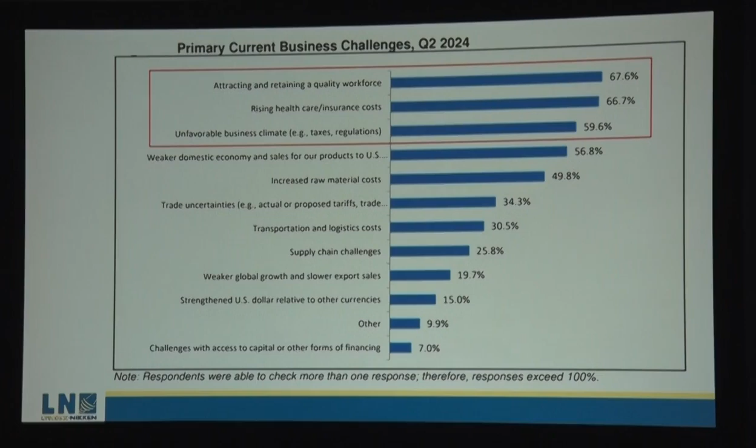Now, this slide is showing that retaining quality talent or quality employees is still at the top of our list. This was the second quarter of 2024. But what the article mentioned was that the rising healthcare costs and unfavorable business climate has actually grown over the last few years significantly. It was like a 20% increase on the rising healthcare. So it jumped up from that mid 40% up to the 60%. So attracting and retaining employees is still top of the list, but the increased cost of healthcare is taking over as well.

That's a national average, so I'm sure that if I surveyed California versus Florida, those numbers would look different. Something Steve and I were talking about today, I'm from Houston, Texas, and I still go into shops. I'd say 60% of our shops are still unair conditioned. You don't have to be in Houston to know that in the summertime machine shops get hot. But in Houston, you can pay your people less if they've committed to the industry and your shop is air conditioned. I used to live in San Antonio, and I was driving into Uvalde, which is like an hour and a half away, and they would bus their employees in from San Antonio, and they would work there because their shop was air conditioned. So I put that in there. My research did not show, hey guess what, Amazon is air conditioned, or Lowe's or Home Depot is air conditioned, but I do know that it is something that our employees are experiencing.

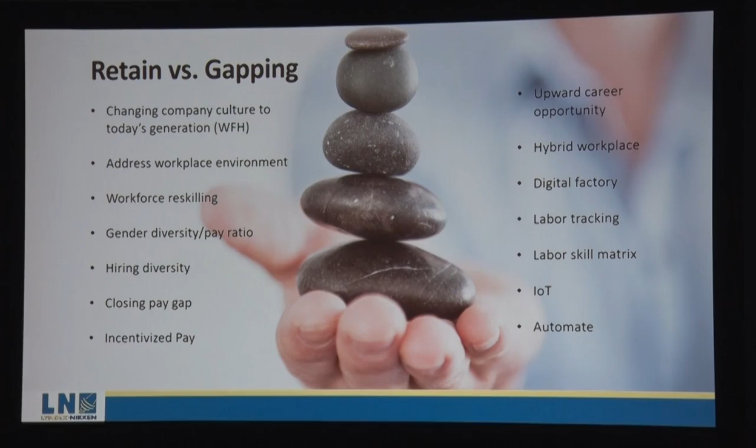And so today, as leaders, we can't afford to procrastinate understanding the changes that we need to make. I mean, it's the current environment, the future is telling us that we need to make these changes. And what we've got to understand is, what do we need to do to retain while bridging this gap? It's not an either or, like how do I retain or how do I cover the gap? We need to figure out how it works together. Some of these bullet points, I could read them to you, but they're all part of this corporate structure and the things that we're doing, closing the pay gap, workforce reskilling, the digital factory is how we're going to bridge these gaps. So these are all things that we need to understand as leaders.

And when we talk about lean manufacturing, I'm sure we've all heard this and have some kind of understanding of it, but lean manufacturing focuses on increasing efficiencies and decreasing waste. Of course, Toyota made this popular back in the 40s and 50s. They started doing their own experimenting. In the 60s, they started making big changes across their manufacturing facilities. There are 8 categories of industrial waste identified in lean: defective parts, overproduction, wait time, non-utilization of talent, inventory excess, transportation, motion waste, and excessive processing. And this looks different if you're an assembly plant, or if you're a production shop, or if you're a job shop.

The 8 categories of waste still exist within your facility, but how we tackle or solve this waste changes from facility to facility. So really the question is, does lean manufacturing work in a job shop environment? And does it mean we have to scale down our workforce? If I implement lean, do I need fewer employees? This is kind of a yes, no, maybe.

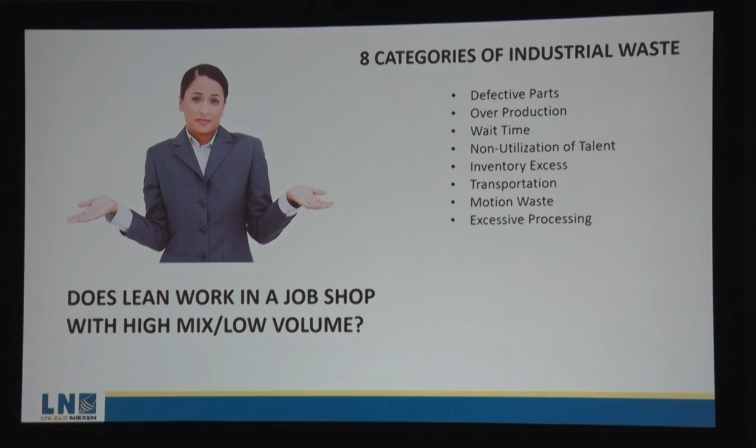We have conversations with manufacturers. I'll have a CEO with his programmer next to him. We'll be talking about automation, and the programmer's like, 'Oh, you're trying to get rid of me.' There's a lot of emotional connection to jobs, to job descriptions, to processes. So we have to take it as a slow step. It's more of a journey as we go into lean at whatever level we enter. But the changes are possible, and we have to keep an open mind.

So these are 4 of the steps we're going to discuss as we look at how we can convert our shops, how we can become more efficient. We have less people in our industry, so we really need to be able to make them more efficient. How can we do that as shop owners?

The first thing we need to do is understand where we're at before we can implement the other processes. We have to gather information and put together a plan in order to make our people more effective. We don't want to replace them—we actually want more people gathered in, and we want to educate them up. So we need to find where we're at and what the starting point is before we can move on.

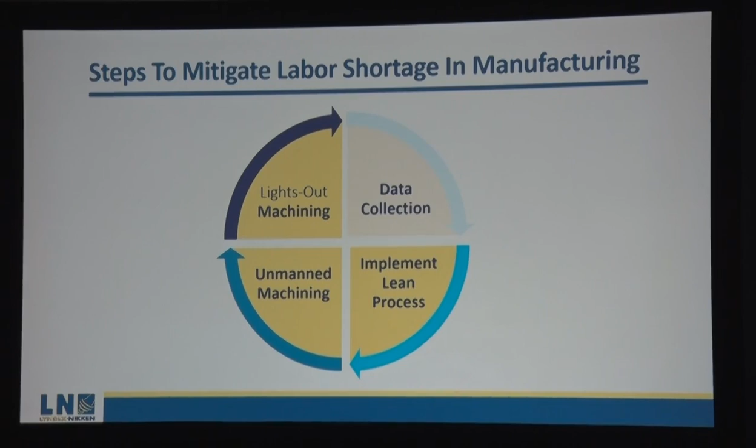Spacebar. Oh, thanks. Okay, so, data collection.

Right now, if you watch any kind of major sports, analytics is a key part of everything you find. Should I go for it on 4th and 1? Should I take a 3-point shot versus a 2-point shot? Data is very important for decision making. So if you're in a shop and you're not fully aware of what your machine times are and what you're doing, it's very difficult to make key changes.

So we need to start gathering data, and what's that going to look like? We don't want it to be so cumbersome that it's overwhelming and then we push it to the side. In the process of doing this, we have several areas we need to understand in our shops: measuring productivity of employees, and then machine efficiencies.

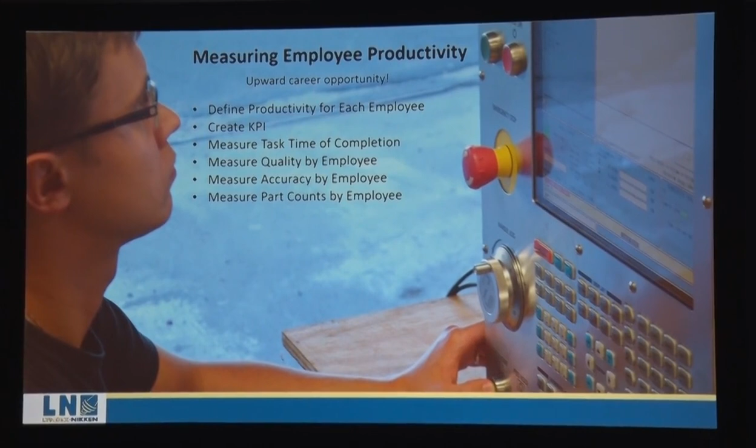So in order to keep personnel, we need to define what they do. We need to give them objectives. You want them to desire to stay in your facility. Is your shop clean? Is it safe? Does it have the latest technologies? Are you helping your employee do their job, or are you making it a hindrance? Are you using old technology that makes them struggle? If you're making your employees struggle, they're not going to be efficient—they're going to spend time frustrated doing tasks that could easily be done with updated technology or education.

So for employees to be happy and want to stay, you need to give them objectives. You have to have a way to measure what they're doing and set goals for them—key performance indicators. That could be as simple as: are you making your part count? Are you here in a timely manner? Is your machine running the times it should be? Or are you here on a Thursday, a little bit hungover, turning the feed rate down to 70%, cheating the system because you don't feel good that day?

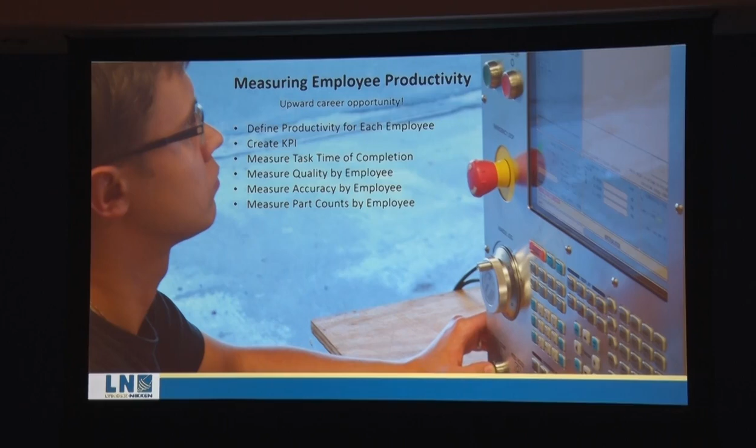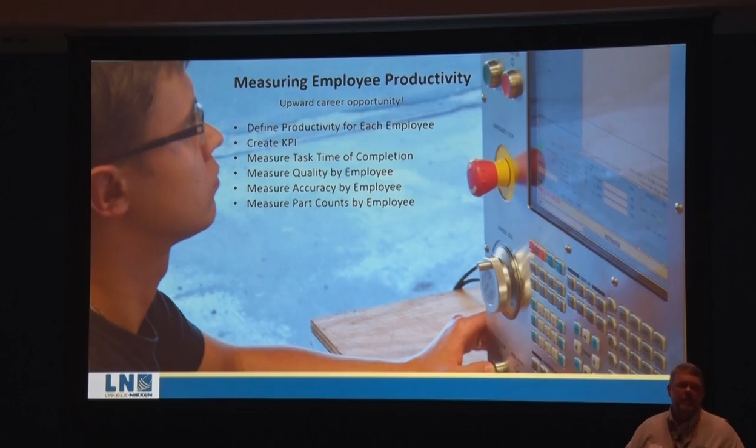So we need to measure and keep people accountable for our own sake, but also for their growth and development. If you're working for a company and you don't know where you stand, how you can get a raise, or how you could move forward and what the objectives are, it becomes very difficult to stay there.

And on the machine side, how effective are your machines? In a perfect world, if you're running a 40-hour week, you would believe the vertical or horizontal machining center you purchased would be running 40 hours cutting chips. That's a perfect world, but we know that's not true. So in your shop, do you know what that looks like? Do you know when the machine's cutting chips or it's idle because people are setting up jobs? And if you're not monitoring that, it's very difficult to decide: do I purchase new equipment? Am I keeping up with jobs? Am I inefficient because the operator is slow? So those are some things we need to monitor and separate to understand the whole picture.

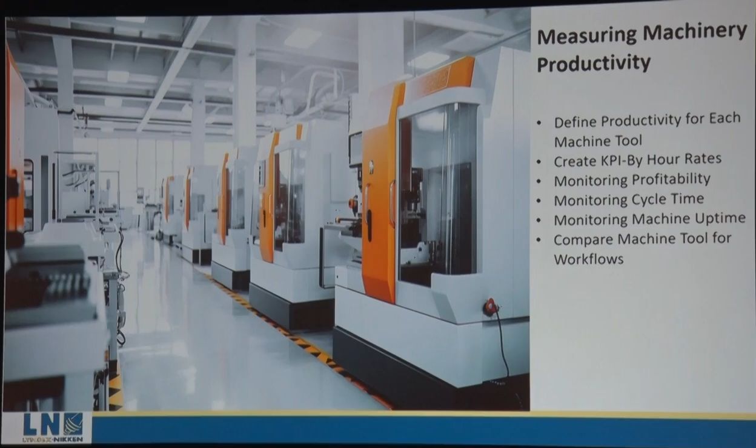So data collection, what does that look like? Is that a difficult thing? Is it expensive? What's available on the market? There's software, there's other products where you clip onto a power line and it monitors spikes in power consumption in the machine.

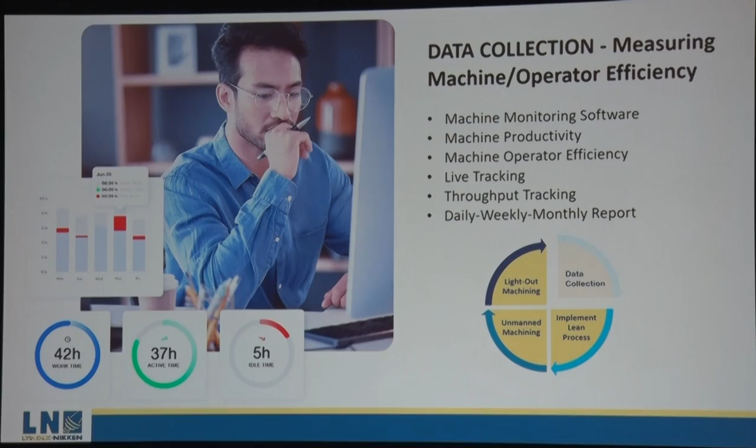This is a product that uses data collection through the light tower. Very effective. You take the machine's light tower off, mount this on, and it monitors cycle start, cycle finish, and idle time. What that's going to tell us is we can map out our machine shop, I can put as many of these in. Machine number 1, I can assign it to an employee. I can monitor a job time and job cycle. So I can be very specific: hey, machine number 1 is Bill, he's running this job. This job is running very slow today. What's going on? Is he having programming issues? Is it a part slipping? Is it bad parts, bad cutting tools? So I can monitor that specific machine.

And the end goal is to send out a data report of machine utilization. So a certain percent, my machine is up and running, I'm making good parts. A little time is red, that means the cycles have stopped, sitting dormant until someone starts them. And the yellow segment might be—I think up here it's 27% of the time the machine is idle. So if that's the case, what's it doing in the idle time? And if you don't know what it's doing in idle time, this is a way to track that. It's a very simple way to do it by just replacing your standard light tower on your machine. They hook up Bluetooth and provide you this data, and then you could spit it out into Excel and other formats.

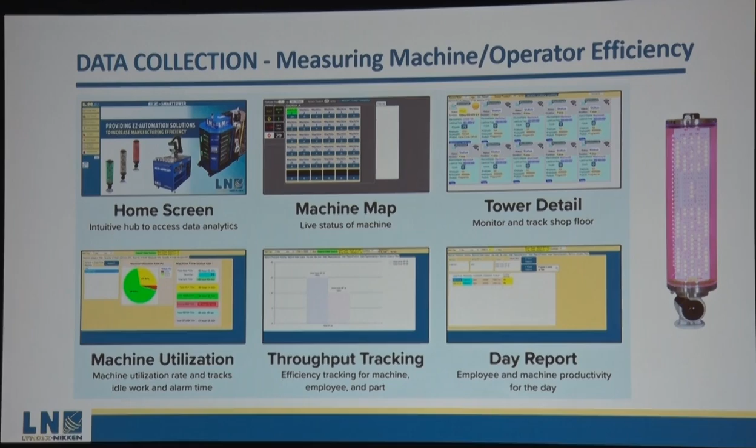So we've collected our data, and now we know that perhaps setup time is very, very expensive and that's what your weak spot is. So now we're going to implement some of those findings and figure out how to fix the problems. What are the bottlenecks? Is it just employees not being productive? Is it setup time? Is it issues? So we've got a good piece of data and now we can work from that data.

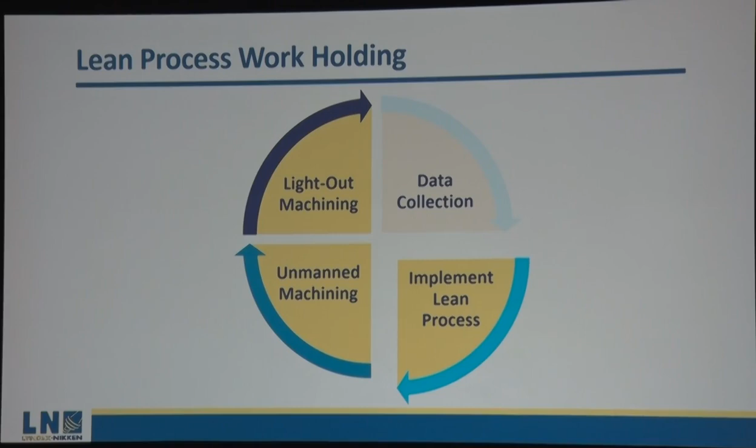So if it's work holding and job changeover—if you're a job shop and you're changing jobs multiple times a week, it's very difficult to stay efficient. There are products in the market now that help changeover become very fluid and simple. It allows you to become very agile, and also it's worker friendly. So we're going to look at a few examples.

So in the old days, when Stephen and I worked in the shop, you had Kurt vises. I programmed at my control. I would literally program G-code into my control the whole time. So that machine would sit for hours while I sat at the control programming it.

So now there are systems like this. This is a zero-point system. What it allows me to do is easily, in seconds, release work holding from your machine platform and change it out. The days are gone of a 15/16 wrench, unbolting my vises, sliding them off, stoning the table, restoning vises, changing my fixtures out. These systems are designed to fire air to them, lift your work holding off, and place a new one on. The accuracy of systems like this are within 1/10, 2/10, so your home positions, your origins for your work, should be known. You could go right to work—start cycle, off you go.

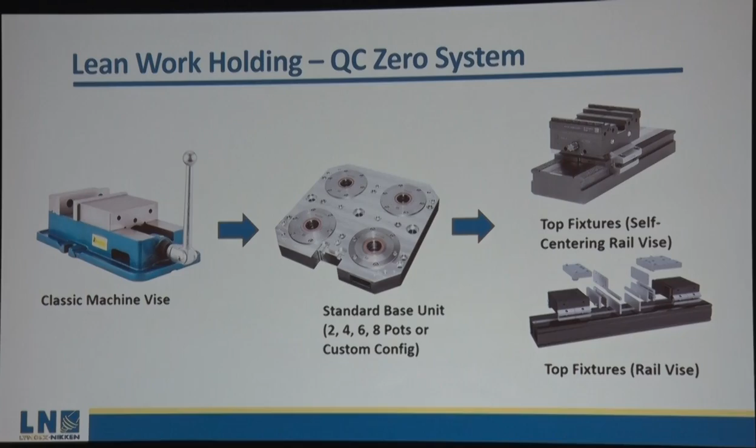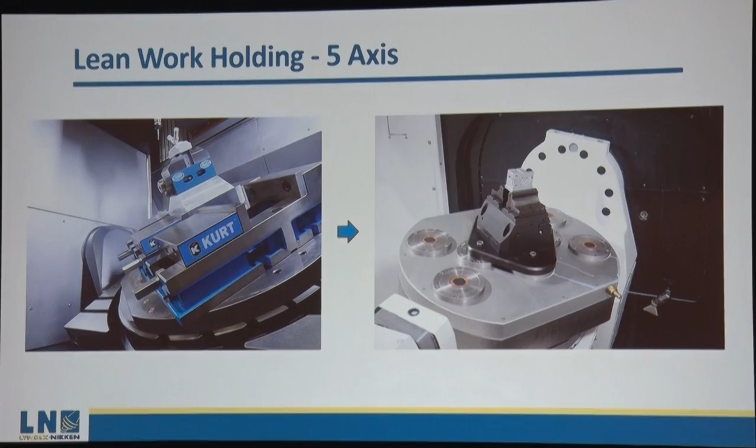So is it available just in a vertical platform? It can be done in 5 axes. It can be done in horizontals. And this is some of the examples of what it looks like. With 5-axis machines and complicated parts, you need to reach into tight spots—the traditional way of clamping parts becomes cumbersome and ineffective. You're stacking on top and trying to reach around to get into tight spots. So with the zero-point system, you can easily take pneumatic vises on and off, change work holding positions, and always have that location known. So it's very simple and easy.

Here's a few examples of prefabricated products that can be used. If I need to boost a part up, I have a riser platform. I have a rail vise system. So I have a variety of off-the-shelf items, so I'm not making fixtures. When I worked, a lot of the jobs we did, we'd sit down, design a fixture, get some steel, start making clamps, drill, tap, and create fixtures for each job. On the market now, these type of systems are very easy to use, and you can find different systems that are more functional and helpful.

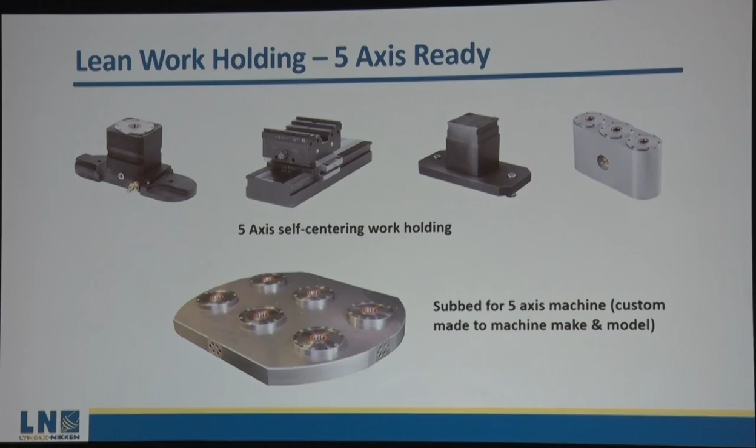Here's another example where with these zero-point systems, I don't only have to put vises or work holding, I can machine, like dovetail is very popular now, dovetail vises. With this system, I can machine pull stud holes, drill and tap, put the pull studs in, hold the part, machine it, flip it over, deck it, and I'm done. So I can do more complex parts more easily.

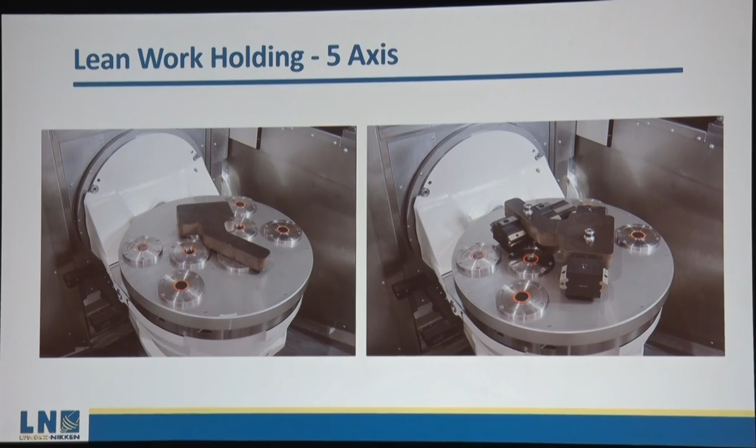Here's a few more examples. I could do rail vises, hold multiple parts, grab long, awkward parts. So this is not only quick and agile for your shop, but also for your programmer, your setup guys, and the operators. It's all about, whether we like it or not, quality of life is a big issue nowadays. I don't have to work here - I can go work at McDonald's for $15 an hour and not come home with cuts and scratches, and not be lifting tons of parts and heavy stuff. So systems like this, for an operator, are very convenient, easy, and make work more palatable.

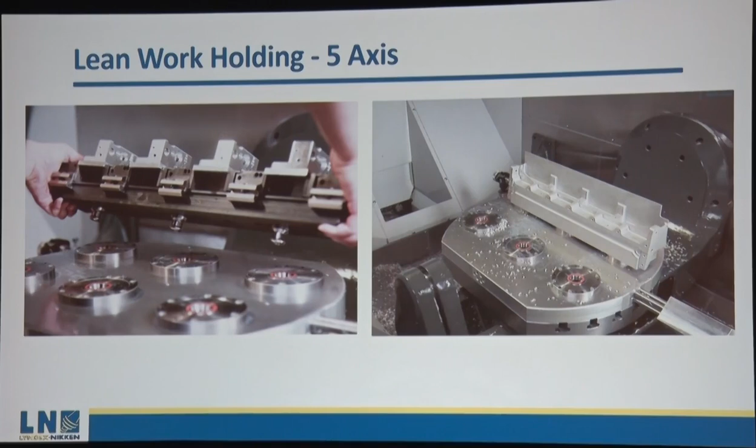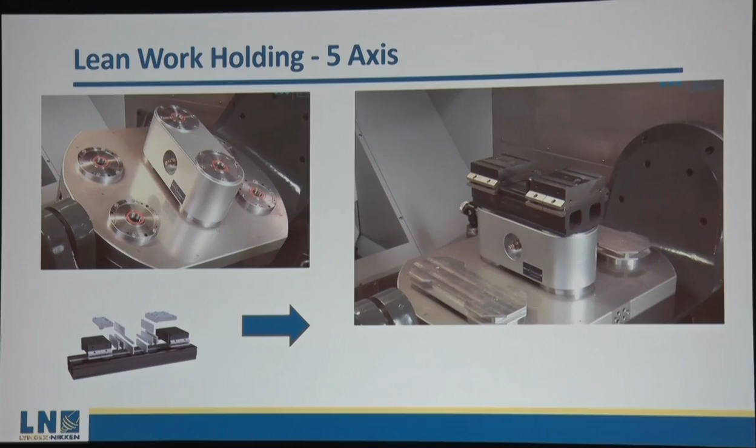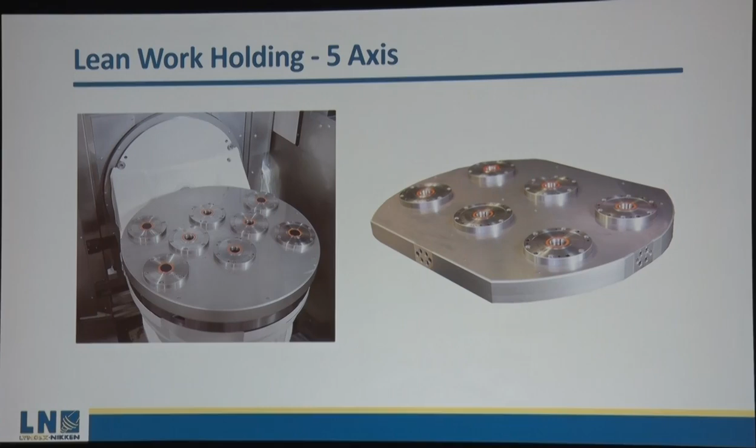And then here's a couple more examples. This is the riser. I could directly mount a part to the riser, or I can mount a vise to the riser. In seconds, I can just hit air, take it off, and place something else on, and have known locations, known origins stored in my machine. So these are ways we can help make our people more efficient and effective, because trying to reset a 5-axis machine with different fixtures, trying to find the center points, can be very difficult and time consuming.

And this is vertical applications. So I can grab long parts, short parts. I can grab a vise with a vise. I can adjust these vises. So it's all about flexibility and ease of use, right? This is the type of product and technology that can help you get away from manual fixtures.

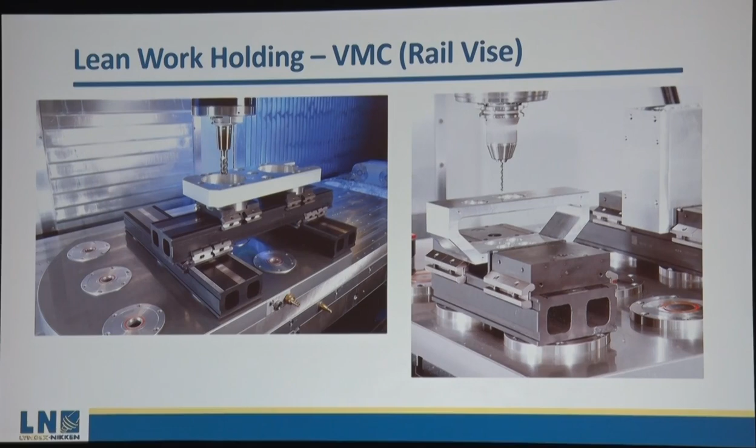And here's some of this stuff - if you're not familiar, you can put this on rotary tables. It's good for me, I'm the rotary table product manager, I like this slide, this does me good. But again, this is about flexibility and production, right?

If I can load all these sides with parts, I can hit a cycle start, and then my employee has time. In my day, my boss would pull the belt sander up and a drill press, and then I would take parts off the fixture, deburr them, chamfer them, and put them in the box. Nowadays, if there's a shortage of workers, I can load a system like this. I can have a secondary machine nearby, and if we're efficient with our work holding, we're building time. By being more efficient, we're building more time for them to be free - they can easily run 2 machines, perhaps 3 machines. And this would be close to getting automated, right? So we could do this in a manual way and then automate it. The job here is to find ways for people to do more with less.

So what challenges do you generally see in the data collection process? It's how it's monitored - a lot of people just check cycle start and cycle finish. And how does that look? If you're not gathering all the data of the machine, then it's garbage in, garbage out. There's a variety of different systems, there's softwares - it's all generated by price point. What's your investment? What are you willing to invest? If you're a small shop and you don't have a lot of money, there are still sophisticated systems with software and readers on each machine that gather data. It's all about what you can afford to do. There are simple ways, and then there's more difficult, more sophisticated ways. So it's all scalable, so to speak.

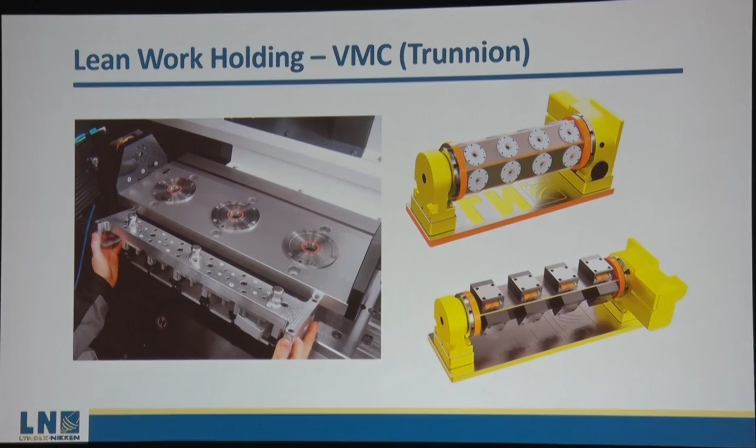What you were doing 25 years ago versus today, it's night and day. So as machines advance, there's monitoring software built into them, and a lot of different add-ons. It's up to you as the owner or manager to weed through that data and find out, for your building, what works, how it works, and what you want to measure and how you're measuring it.

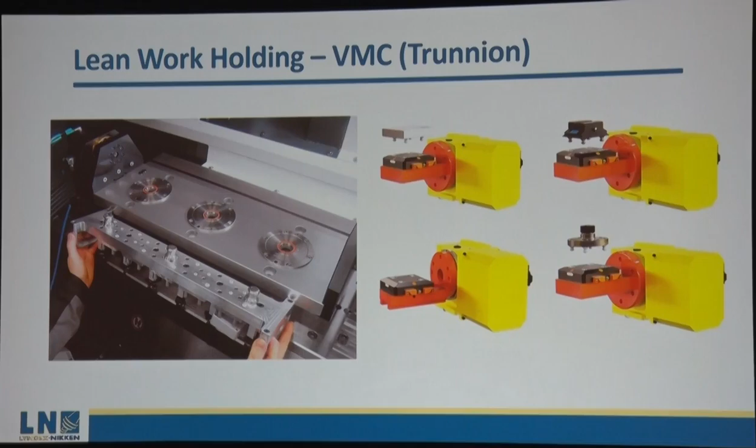So this lean work holding technology can be used on verticals, horizontals. In a shop, I'm not pigeonholed into one thing. I can use it on 5-axis machines, vertical machines, horizontal machines. I can use this kind of technology on CMMs.

So as a part goes through your system, these lean practices and technology can help streamline all your processes, which at the end of the day frees up time for your employees to do other things, and you get more mileage out of them. It also makes their life more comfortable because you're providing technology and education.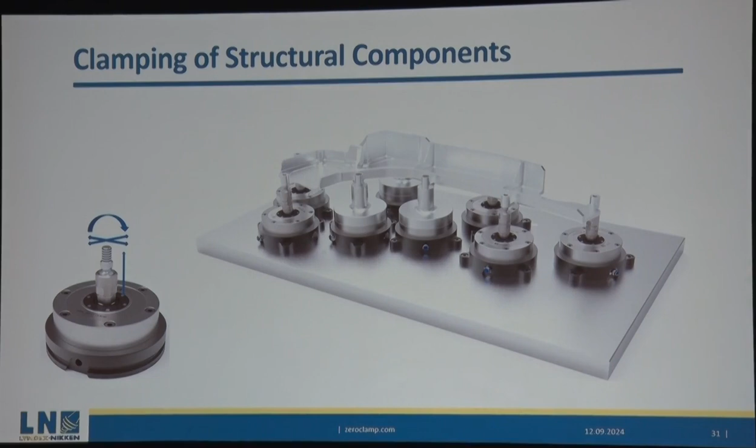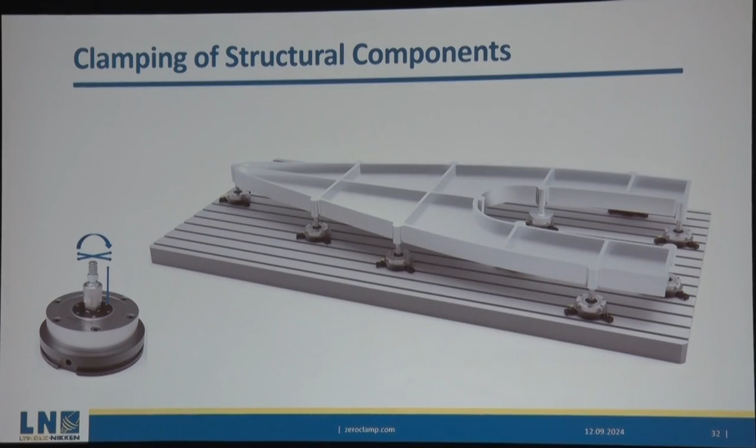Okay, so this is an example of the clamping structures. This just keeps showing more and more of the versatility. I can clamp directly onto sophisticated parts where you normally couldn't grab this. How would you clamp this? You'd have to build a very expensive fixture to hold these. Now, by using just a threaded rod into one of the clamping units, I can put very sophisticated parts on here.

We got put in the wrong mode. Oh, that I must have. Okay, I think it stopped. Sorry, I put it in a mode, my apologies. All right, I think we're good now.

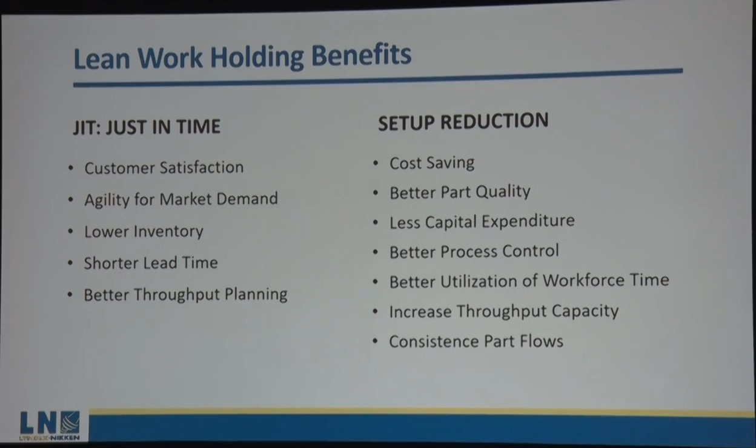I think another thing too, one more thing on that technology or the data collection: how many people in here have a machine with Fanuc controls on it? Probably almost everybody—less than I thought, a lot less than I thought. But Fanuc has a lot of data collection built into their servo motors and controls.

And our machine tool dealers—when your machine tool dealer comes, does he tell you that your machine can let you know if your servos are getting hotter than normal, or experiencing more resistance on them while working?

FANUC has a lot of technology built into their controls, but there's not a lot of education letting us know that technology is there. So there's a lot of education and a lot of choices to be made in data collection.

We've talked about implementing lean processes to help remove waste from our manufacturing processes. Our vision for automation at Lyndex-Nikken is to automate your lean processes, and we have two versions of automation that we've identified.

One is unmanned machining automation, where maybe your part quantity is lower. So instead of having enough to cover 16 hours of production, you might have enough to cover 8 hours, but that gives your operator more freedom.

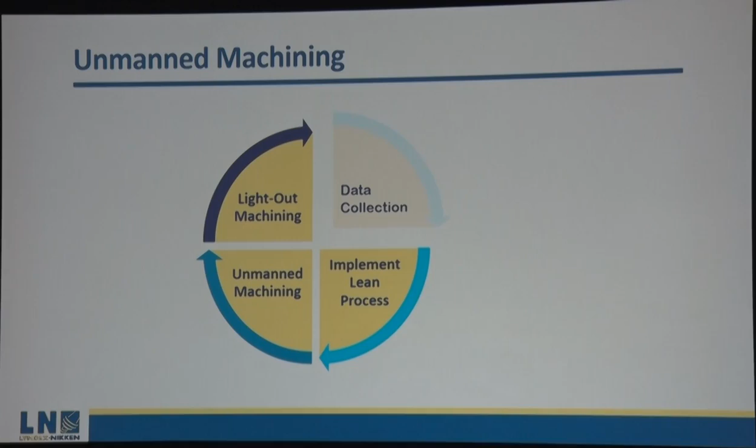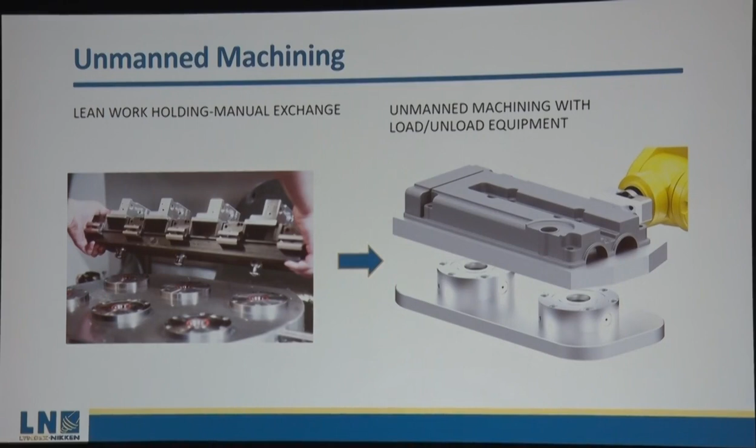Maybe it covers 6 hours and gives your operator more freedom to go do other things. The other version of automation would be lights out, covering multiple shifts. No one's there, the lights are out, it's unmanned. We do this by automating the lean manufacturing processes you've already started to implement.

This goes across your entire shop, whether mills or lathes. Lathes are nice because automation is easy—you can bar feed, we have parts catchers, all those things. But sometimes you need more automation at a lathe.

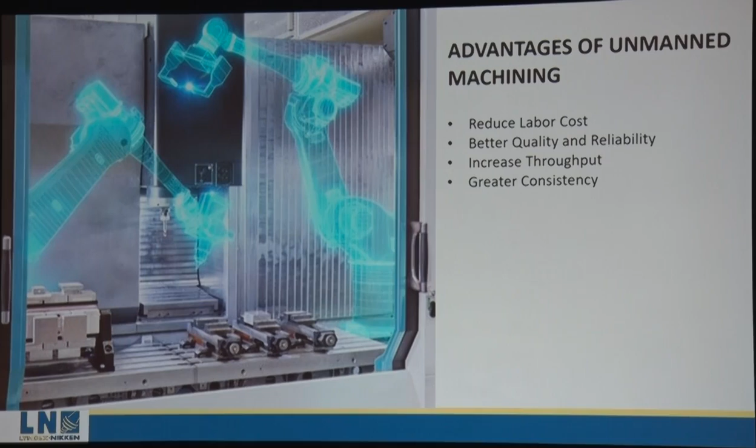Some advantages of unmanned machining would be reduced labor cost, better quality and reliability, increased throughput, and better consistency.

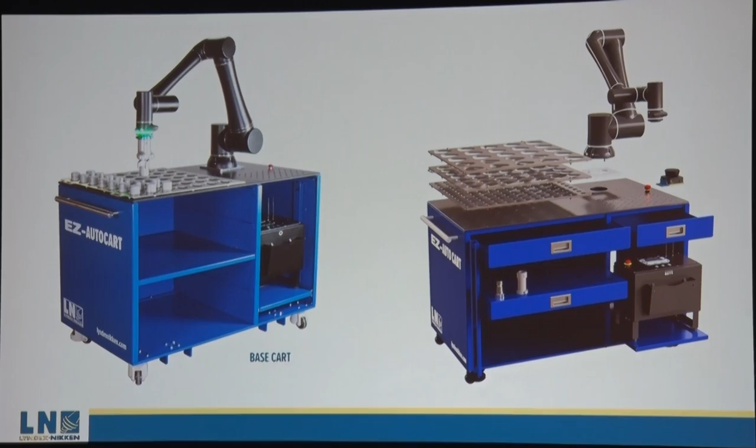These are some systems we would consider unmanned, so you don't have the part density to carry you through multiple shifts, but we have simplicity for setup and area scanners for safety. Other options have a bit more part density, but still the parts' cycle time may not get us through multiple shifts. This style has a rack where you can load parts on one rack and then just switch the racks out quickly.

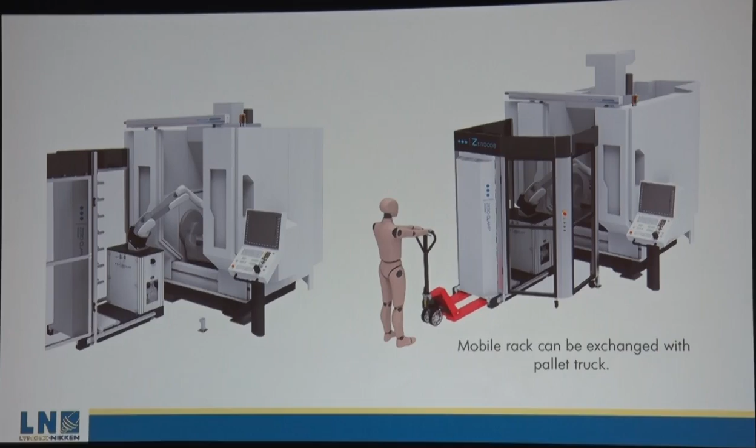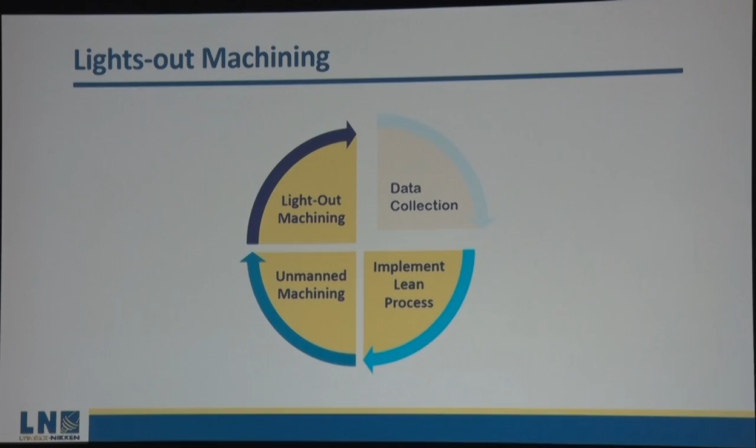Typically your unmanned solutions aren't as difficult to integrate as your lights-out stuff, because you're not monitoring as much on the machines.

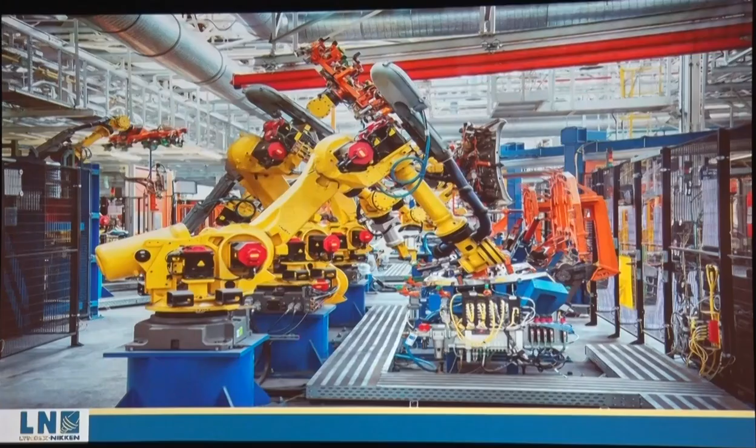As we move into lights-out machining, it takes a lot more—I wish FANUC made a machine that looked this cool—it takes a lot more technology and integration. While we might think that unmanned or lights-out machining looks this complex...

Or maybe in your job shop scenario, you feel like you don't have enough part density or quantity on your parts to warrant or give you an ROI on automation.

Typically when I think automation, I think of the automotive space—this is obviously some kind of welding or sheet metal process. Probably not something anyone in this room does, but we've all seen shops with mills dedicated to Ford calipers. Maybe we haven't seen them, but we know they exist. And that's not quite what it takes.

What our focus is, again, when we look at lean, is high mix, low volume. So we need something that is easy to set up, doesn't cost an arm and a leg, and lets our operators quickly change from job to job.

This is a pallet-based system with a nice little industrial robot on it. It has a user interface that's very simple to use—just a few questions to get you up and running.

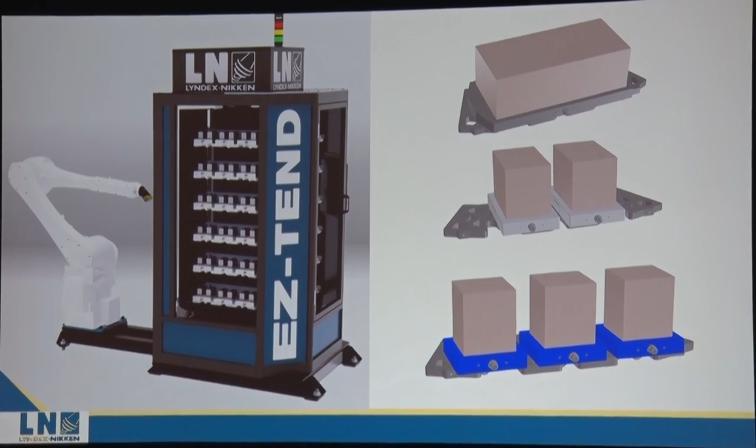When we look at the ROI side of things: 20-minute cycle times, is that fairly normal for our mills? With a 20-minute cycle time and 72 parts, you could look at 24 hours of unattended runtime on this system. Maybe your parts are a little bigger, so then we're at the 16-hour mark. The ROI for high mix, low volume exists with the correct machine tending automation platform.

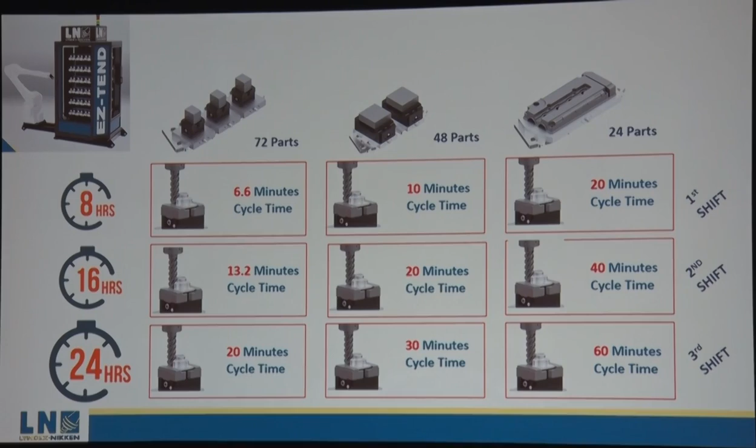We can also get into more complex CNC or machine tending systems. This system will load raw parts, then switch out your top tooling and run vice work. So your op 10 can be put in pretty quick and easy, then it can switch itself out for that op 20 for the vice work.

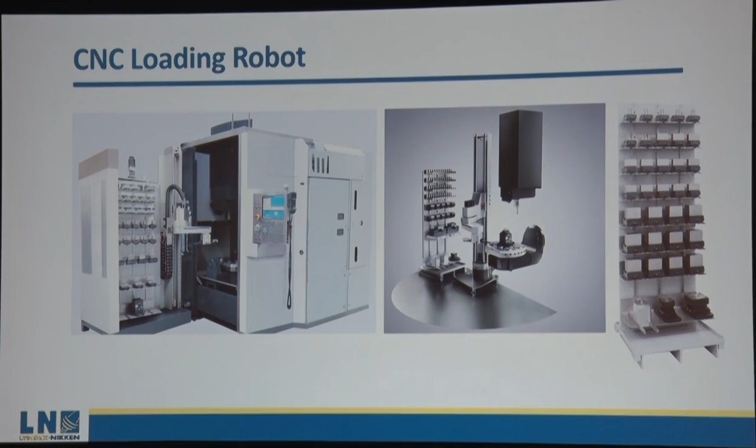There are a lot of systems out there today that help us take these lean manufacturing processes and get them automated, without requiring the expense of robotic engineers or developing a system specifically for your shop and processes. That's kind of where the journey comes in: we collect our data, look at our manufacturing processes, identify waste, implement lean processes to reduce that waste, and then finally take those lean processes and automate them.